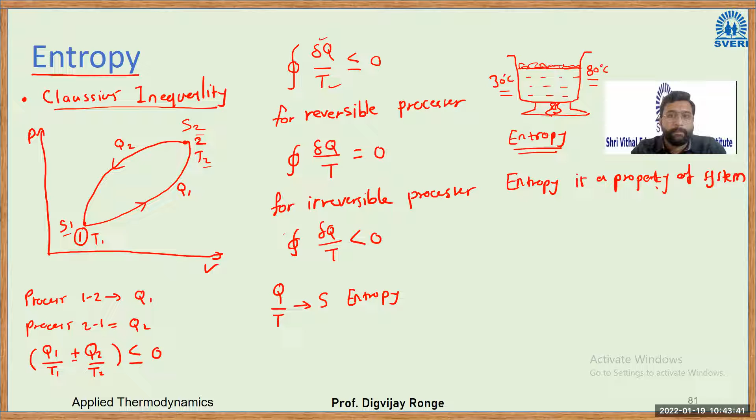Now, what about processes? We have studied about the cycles. Next I will draw a process. Let us say I have a P versus V chart. Initially we are at state 1. Slowly, a process takes place and it reaches state 2. What about entropy change in this process? For this, we have a rule that integration dQ/T is always less than or equal to 0.

Okay. Integration dQ/T is less than or equal to 0. Okay. So previously, write down this part first. Write down this for the cycle, and then we can go for the processes. Write down Clausius inequality.

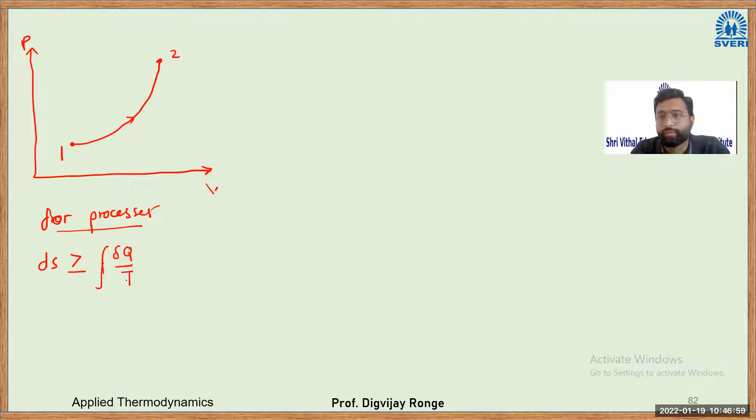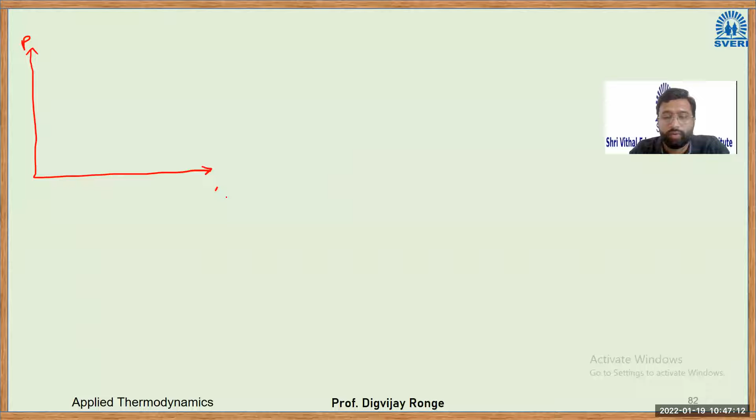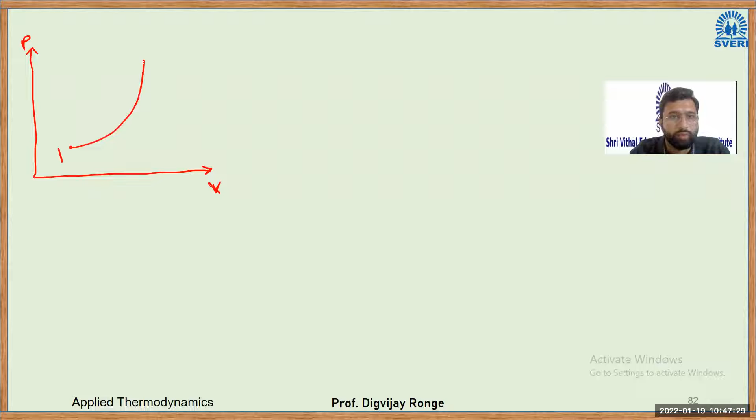Okay. So for cycles, we have this law: integration dQ by T is less than or equal to 0. For processes, what is happening to this? I don't know. Wait. I don't know why. Okay. 1, again I will draw 2. For processes, change in entropy is always greater than or equal to integration dQ by T.

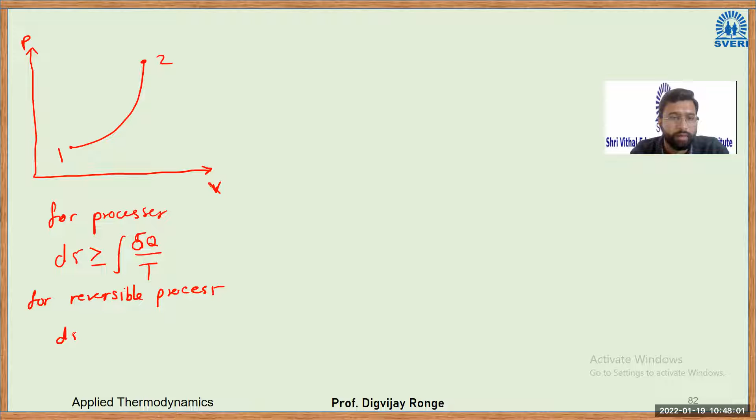Okay. So in this, if the process is reversible, so for a reversible process, in this case, change in entropy will be equal to integration δQ by T. Sorry, this is again integration here. So if I take the integration from 1 to 2, this will be S2 minus S1, equal to integration δQ by T. So this is only for a reversible process.

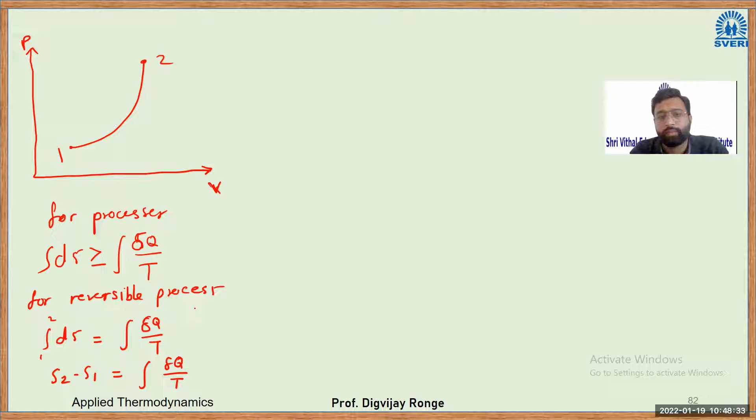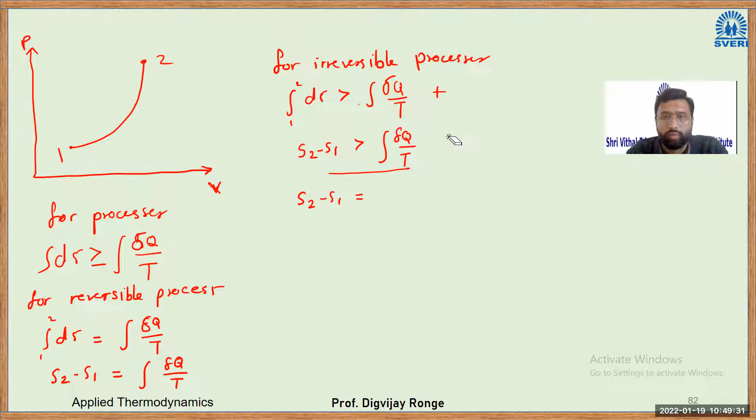Okay. What about irreversible? For irreversible processes, this integration dS is always greater than integration dQ by T. Now, if I want to make it equal, I have to add some quantity here. Then I can make this RHS equal to LHS, right? If I take integration from 1 to 2, S2 minus S1 will be greater than integration dQ by T. Now, if I want to make this equation equal, I have to add a quantity, so it is equal to integration dQ by T plus some constant.

And this constant, we have written it as S generation. What is S generation? S generation is entropy of generation. Okay. So see here, for an irreversible process, integration dS is greater than dQ by T, or S2 minus S1 is greater than integration dQ by T. If I want to make it equal, I have to add a constant on the RHS. This constant we are referring to as Sgen. Sgen is nothing but the entropy of generation.

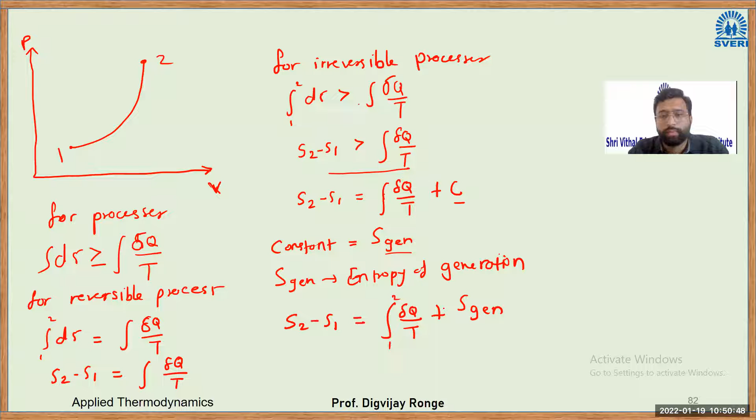So this is again a very important equation I'm going to write. S2 minus S1, that is change in entropy, will be equal to integration dQ by T plus S generation. This is again a very important equation in order to solve the numericals. Change in entropy is equal to integration dQ by T plus S generation. Okay, write it down.

Yes, written. Now let us talk about entropy of generation. Okay, this is again a very important topic. Entropy of generation, or what we call Sgen. Now, from the equation you can see the change in entropy. Let us say previously the entropy was S1, final entropy S2. This change in entropy is integration dQ by T. So whatever heat transfer takes place in this process, you take Q1 divided by T1 minus Q2 divided by T2, that integration, plus some constant. And this constant we are referring to as the entropy of generation.

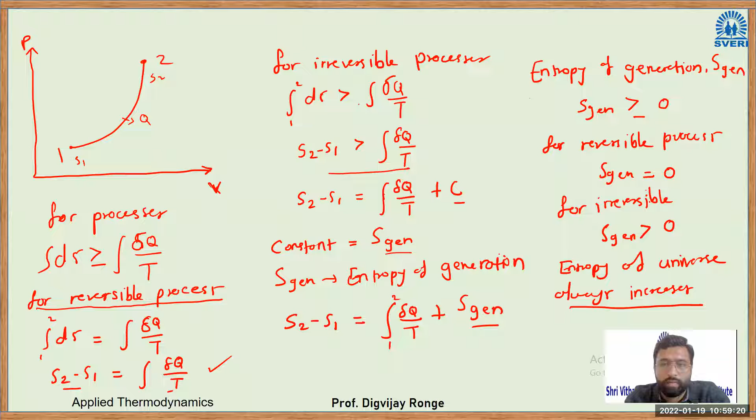Okay, so we'll solve one numerical here and then we'll see the next theoretical part. Okay. So this is related to Clausius inequality. Let us see if you can solve it. The figure below shows a reversible heat engine ER having heat interaction with three constant temperature systems. Calculate the thermal efficiency of the heat engine.

Now see here, there are three heat sources. Heat sources we have studied: thermal energy reservoirs at higher temperature. There are three heat interactions. There is one heat engine, which receives heat from these two sources, Q1 and Q2, does some work, and releases Q3 amount of heat. So in this case, we have to find its thermal efficiency.

For this, we have to make use of Clausius inequality. How? Because in this case, Q3 is unknown. Without knowing Q3, we cannot know the heat interactions. Without knowing heat interactions, we cannot calculate thermal efficiency, right? So I will write down the given data.

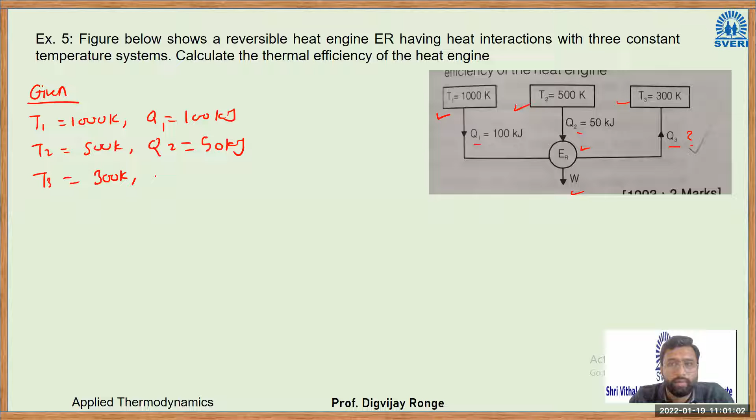Pay attention. So here T1 is given 1000 Kelvin and Q1 is given 100 kilojoule. T2 is given 500 Kelvin. Q2 is given 50 kilojoule. T3 is given 300 Kelvin and Q3 is unknown. W is also unknown, and we have to find out thermal efficiency.

Now, what is the formula of thermal efficiency? We studied in the last lecture it is equal to net work output divided by heat input. In this case, net work output is unknown, that we have to calculate. What is QH here? QH will be all heat received. It is known actually: QH is equal to Q1 plus Q2, so 100 plus 50 equals 150 kilojoule. That is QH, the heat received.

What about W? W will be equal to all the heat received minus all the heat lost. That will be equal to net work done. Again, in this case QL, that is heat lost, is Q3, which is unknown. Now, how to calculate Q3? For this, we have to make use of Clausius inequality. See here, this is a reversible heat engine. A heat engine, in this case, we can say, is a cyclic process.

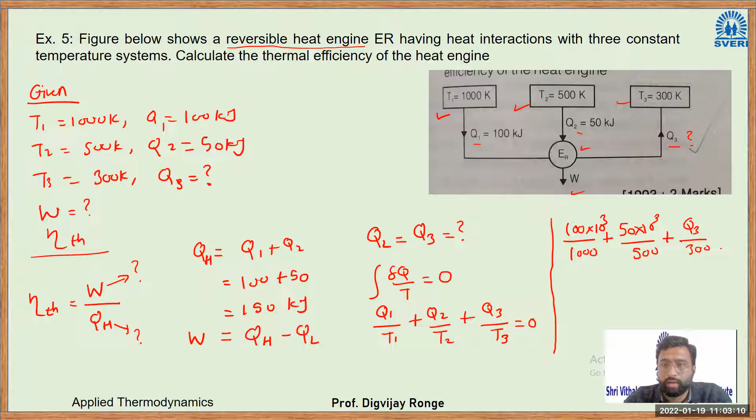So we can write it as integration dQ by T equal to 0, or I can say Q1 divided by T1 plus Q2 divided by T2 plus Q3 divided by T3 will be equal to 0. So see here, Q1 is given 100 kilojoule divided by T1 is 1000 Kelvin. So I will convert kilojoule into joule by multiplying it by 1000, plus Q2 is 50. So 50 into 10 to power 3 divided by 500 Kelvin plus Q3, unknown, divided by 300 will be equal to 0. So can you calculate Q3 from these equations?

Can you calculate Q3? So here I will cancel 1000 to 1000. So this will be 100. Again, plus I will cancel this 500 with this. So this will become how much? 50 into... this will become 100 plus Q3 divided by 300 equal to 0. So calculate Q3. Just calculate Q3. And by calculating Q3, calculate the thermal efficiency.

Okay, see, I will explain this example. So here in this case, we had two sources, one at T1, another at T2. Here we have a sink. So this is a sink and these two are the sources. There is a heat engine which receives the heat. It does some amount of work W and this is the heat loss. So we have to calculate the thermal efficiency: net work output divided by heat input. Heat input will be equal to Q1 plus Q2, the heat received from the sources. So that will be 150.

W here will be heat received minus heat loss. Heat received we know, but we don't know heat loss. So for that we have to make use of Clausius inequality. What is the Clausius inequality for reversible processes? Cyclic integration dQ by T equal to 0. So Q1 divided by T1 plus Q2 divided by T2 plus Q3 divided by T3 equal to 0. From this, we have calculated Q3 as minus 60 kilojoule. I have put this value here again, calculated W, and by calculating W, I have calculated thermal efficiency. So write down this problem. Very, very important problem.

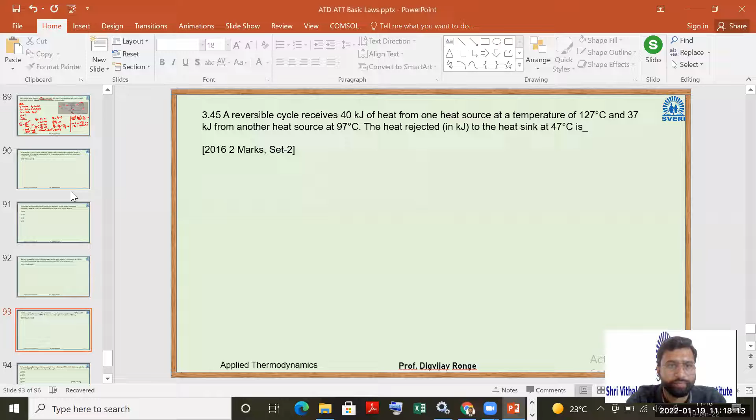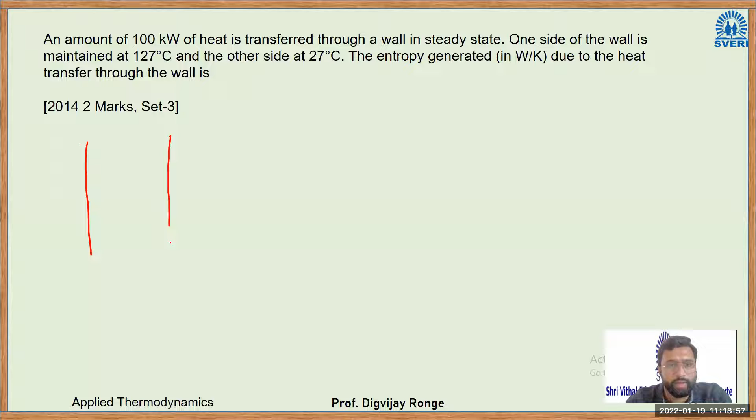So I'll draw a figure for your understanding. So there is a wall. Wait. So this is a wall, okay? What they are saying is one side of the wall is at 127, the other side is at 27. So let us say this is 127 degrees Celsius. This is at 27 degrees Celsius. Inside of the wall, there may be bricks, etc. Material will be there.

So this is the wall, and there are bricks, and on that bricks we have a plaster. Very common example. So amount of heat transfer here is 100 kilowatt, that means 100 kilojoule per second heat is transferring from this side to this side. Here we have to calculate total entropy of generation.

Right. Now see here, the formula for entropy change is S2 minus S1 will be equal to integration dq by T plus S generation.

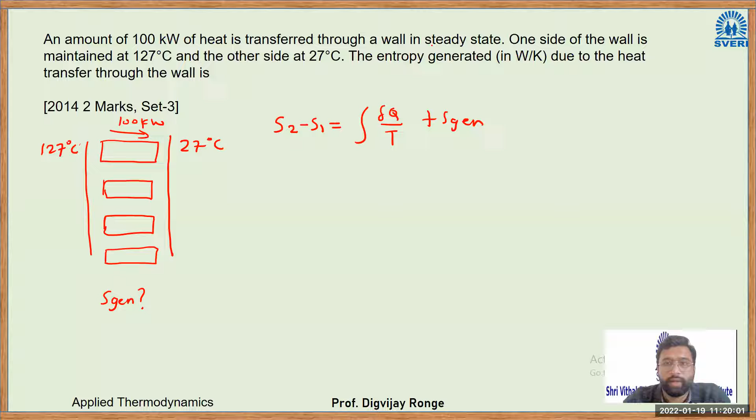Now see here, they have mentioned that heat transfer is steady state. What is meant by steady state? That means this value will be constant for longer duration. These values will not change with respect to time. Steady state means the values or the variables will not change with respect to time. So in this case, this system is under steady state.

So for the steady state, the changing entropy is actually 0. This S2 minus S1 is 0. There is no change in entropy due to steady state, only there will be entropy generation. So due to steady state we can say this term is 0, will be equal to integration dq by T plus S gen.

Now what is dq by T here? That is Q1 divided by T1 plus Q2 divided by T2 plus S generation. Now see here, Q1 and Q2 is same, that is 100 kilowatt. So 100 kilowatt I will convert into watts, 10 to power 3 divided by 127. Now I will convert this 127 into Kelvin, so it will become 400 Kelvin, and this will become 300 Kelvin.

So this will be equal to 400, and plus 100 into 10 to power 3 divided by 300 plus S generation. This side it will be 0 because the system is on steady state, the variables are not changing with respect to time.

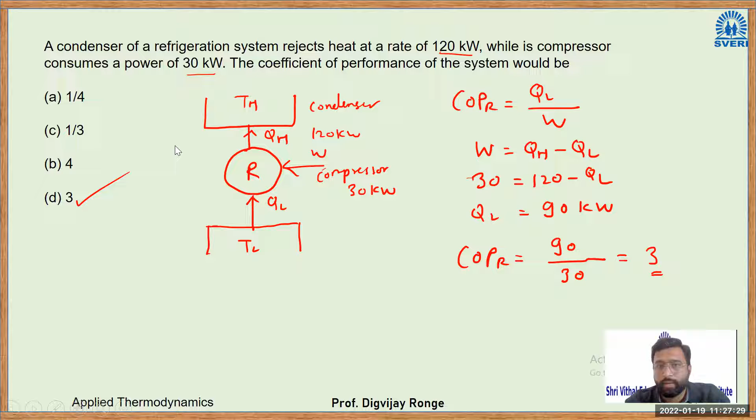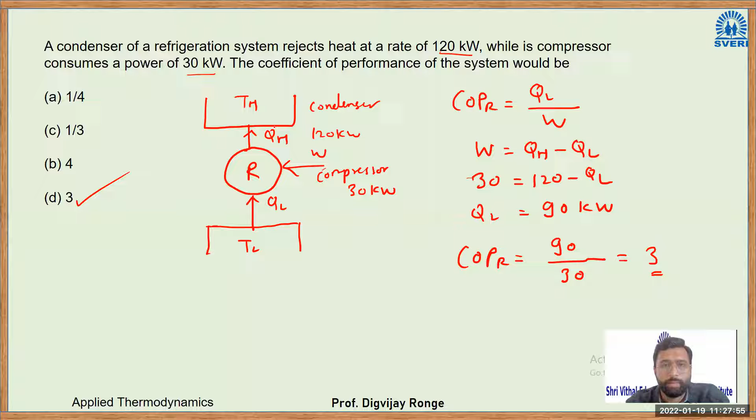Now let us take the next example. I hope everybody is clear about this example.

The heat removal rate from a refrigerated space and power input to the compressor are 7.2 kilowatt and 1.8 kilowatt respectively. The coefficient of performance of the refrigerator is asked. For this example, I will just draw the schematic, rest calculations you have to do.

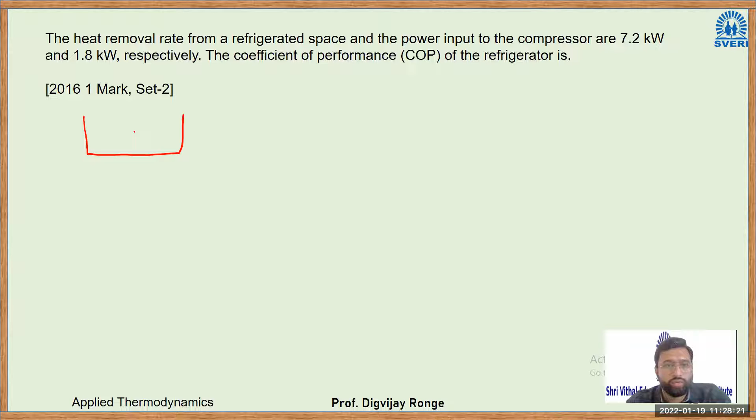So again, this is a source at TH, there is a fridge or refrigerator R, then there is a sink at TL. It will consume W amount of work, it will extract QL amount of heat, it will release QH amount of heat to the source.

What they are given here is heat removal rate, that means QL is given, in this case 7.2 kilowatt. And the compressor power is given, that is 1.8 kilowatt, that is external work done on the system. Heat extracted is nothing but the refrigeration effect, or here QL. You have to calculate the COP. What is the COP of refrigerator? QL divided by W. So calculate and tell me the answer.

Calculate the COP, how much will it be?

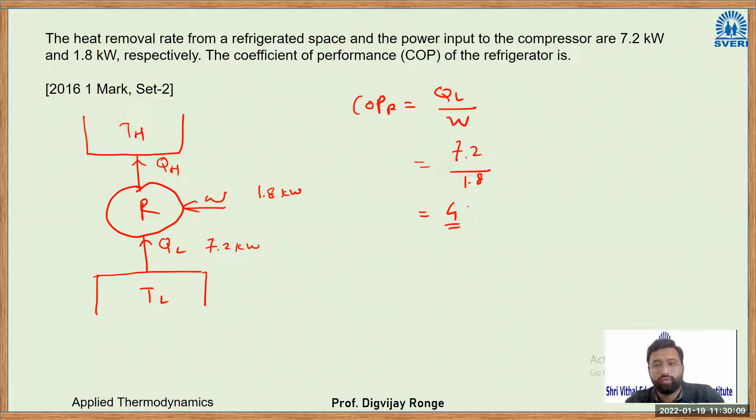Next is 3.45. So this is a numerical number.

A reversible cycle receives 40 kilojoule of heat from one heat source at temperature of 127 degrees, and 37 kilojoule from another heat source at 97 degrees Celsius. The heat rejected to the heat sink at 47 degrees Celsius is to be found.

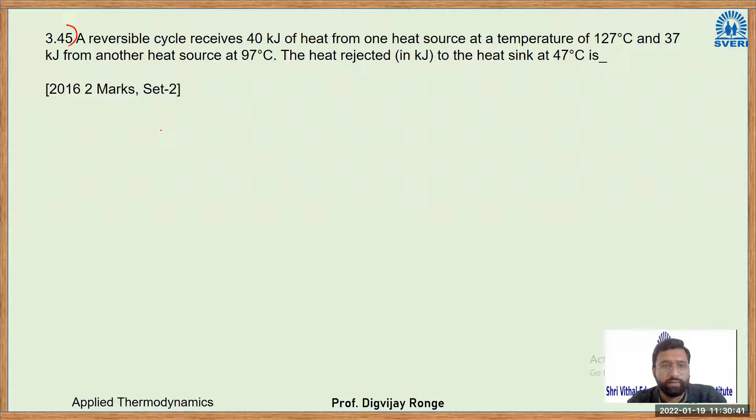So very interesting problem here. We have two heat sources and one heat sink. Let us say there is a heat engine. It receives heat from two sources.

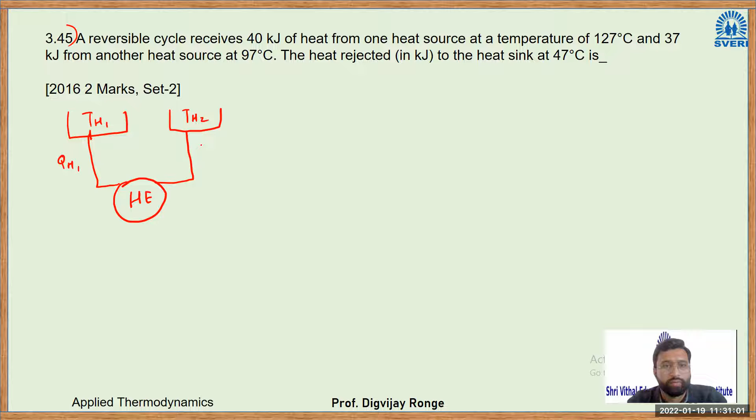So this is TH1, this is TH2, this is QH1, this is QH2, and it will do some work obviously, and it will reject a certain amount of heat to the sink at TL. It receives 40 kilojoule from the source which is at 127 degrees Celsius. It receives 37 kilojoule from another source which is at 97 degrees Celsius. Heat rejected to the heat sink is at 47 degrees Celsius.

Now I will write down the given values. TH1 is 127 degrees Celsius. If I want to convert it into Kelvin, I have to add 273, so that will become 400 Kelvin. QH1 is equal to 40 kilojoule.

TH2 here is 97 degrees Celsius. If I want to convert it into Kelvin, plus 273, so this will become 370 Kelvin. And TL is given as 47 degrees Celsius, again converted to Kelvin, this will become 320 Kelvin.

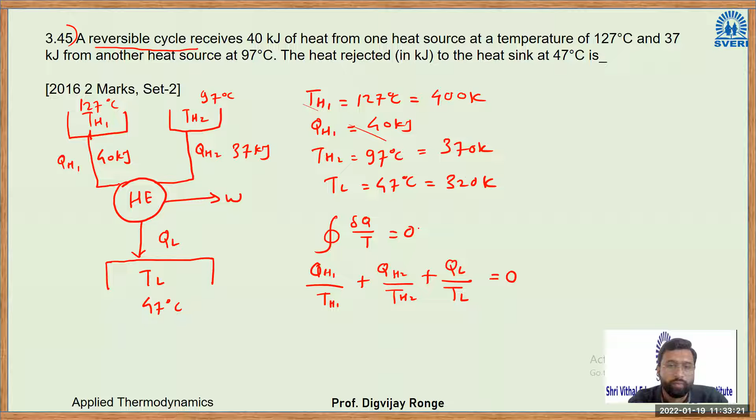For a reversible cycle, we can apply the equation: cyclic integration of dq by t equal to 0. So it will be qh1 divided by th1 plus qh2 divided by th2 plus ql divided by TL equal to 0. All the heat interaction entropy interactions will be equal to 0. So I will put the values here.

40 into 10 power 3 divided by TH1 that is 400, plus QH2 is 37 into 10 power 3 divided by TH2 is 370, plus QL is unknown, we have to calculate, divided by 47, that is 320 Kelvin, equal to 0. So from this, calculate QL.

Can you calculate? Or if I'm jumping too much, I will do it step by step.

So this will come out to be 100, plus this will come out to be again 100, plus QL divided by 320 will be equal to 0. So QL will become minus 100 minus 100 into 320. So this will become minus 64 into 10 power 3, or we can say minus 64 kilojoule.

So if they have asked you only the value in this case, if they are saying heat rejected, it is assumed that it is minus. If they are saying heat rejected, you should write only 64 kilojoule. If they are asking you the value of QL, then you can write minus 64 kilojoule. But if they are asking you only heat rejected, it is actually assumed that it is a heat loss, it will be negative, so you have to write just 64 kilojoule.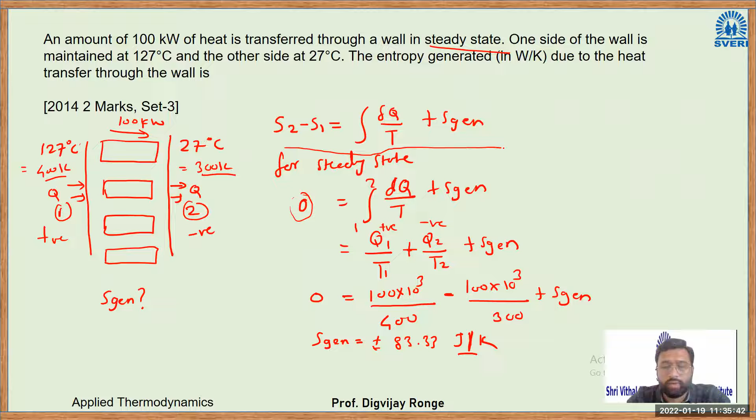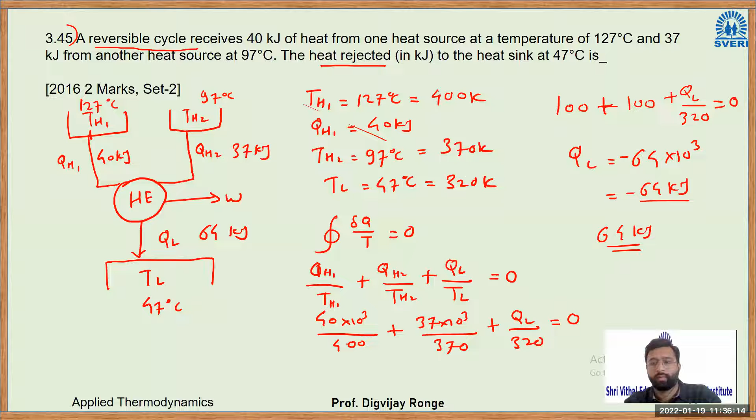Now I will take a last example and then we can stop. For a moment, I will stop the share so that I can copy the numerical.

Okay, so this is the last example of today. A heat pump absorbs 10 kilowatt of heat from the outside environment at 250 Kelvin, while consuming 15 kilowatt of work. It delivers the heat to a room that must be kept warm at 300 Kelvin. The coefficient of performance of the heat pump is?

So may I ask, what is the difference between heat pump and refrigerator? Let us see how many of you remember from last lecture. Does anybody remember what is the difference between heat pump and refrigerator?

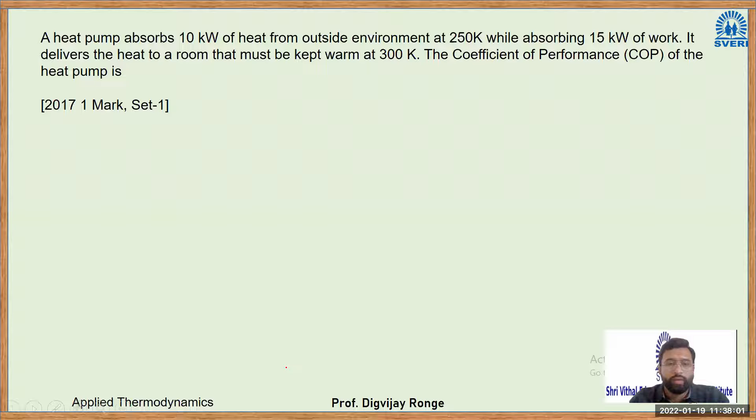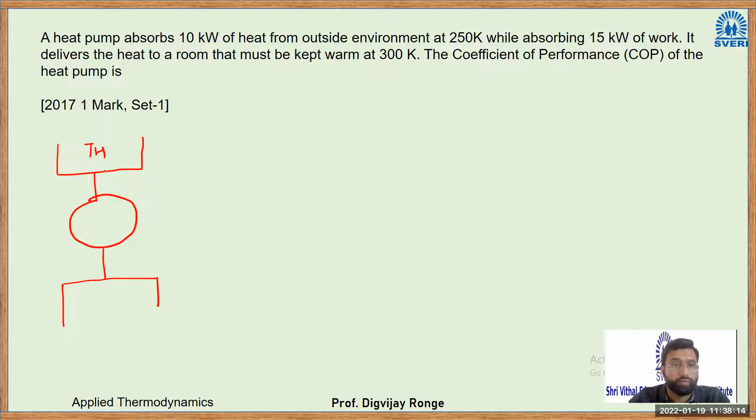So if you see the cycle, I will draw the cycle of a heat pump. This is TH, this is the heat pump, this is TL. It will absorb QL amount of heat, it will consume work W, it will transfer the heat QH. Now if you see, this diagram is same for heat pump and refrigerator.

The difference between heat pump and refrigerator is in its objective. The objective of heat pump is to maintain the source at higher temperatures. The objective of refrigerator is to maintain the sink at lower temperature. That is the objective of refrigerator.

Now what they have given in this case, let us write down. It absorbs 10 kilowatt, which is at 250 Kelvin. It consumes 15 kilowatt of work, and this room has to be kept at 300 Kelvin.

A heat pump is usually used in European countries, that is why we are not hearing its name.

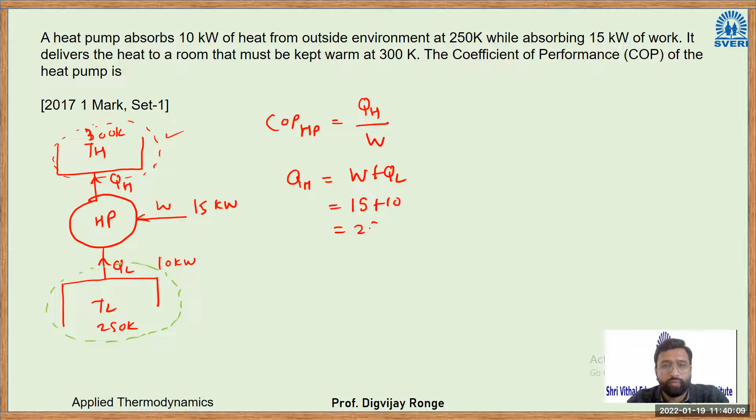Now QH is unknown, it will be equal to work plus QL. Work is 15 plus 10, so this will become 25 kilowatt, right? So COP of heat pump will be equal to 25 divided by W, which is 15. Calculate.

So COP has been calculated by Shubham, I think 1.67. I hope it is correct, Shubham. Yes, okay, so COP of the heat pump will be 1.67.

So this is a very classic question which is asked in interviews or external examinations: what is the difference between heat pump and refrigerator? So you can tell them that heat pump's objective is to maintain the source at higher temperatures, and the objective of refrigerator is to maintain the temperature of sink at lower temperatures. Calculating COP is a very easy part, as you may have seen. So write down this.

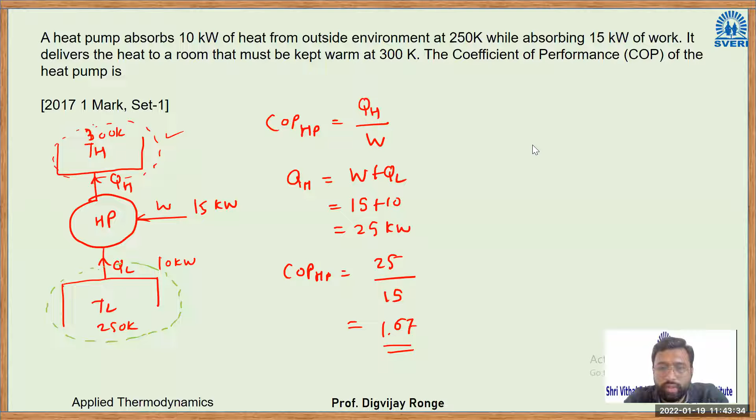Okay. I hope everybody has got the same answer, right? So let us move to the last part of the entropy, and then we can finish this concept of entropy today. So it is related to the entropy change for some of the processes, right? So we'll try to cover that.

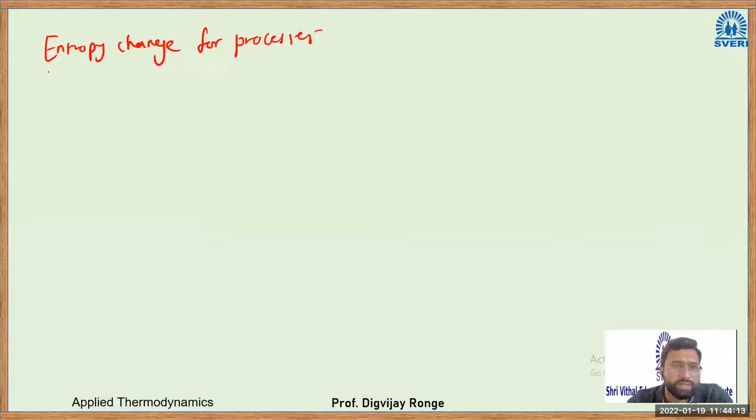So the title here, it is entropy change for processes. Okay, so there are some standard formulas. So first case here, it is for gases. What is the entropy change for the gases? Now, what is the specialty of gases? In gases, we have two specific heats, that is Cp and Cv. This is specific heat at constant pressure. This is specific heat at constant volume.

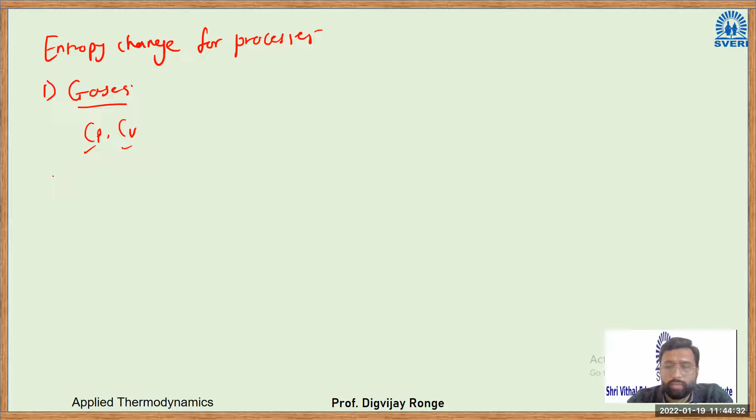Okay, so I'll just write down the formulas for your reference. So S2 minus S1, change in entropy, is equal to Cv ln, natural log, T2 by T1 plus R natural log V2 by V1, or it is Cp log T2 by T1 minus R log P2 by P1.

Okay. So write it down. For gases, change in entropy, these equations are there. S2 minus S1 will be equal to this much. And this is per mass. If you want to calculate in mass terms, you have to multiply by mass. The unit here is joule per kg Kelvin. This is the unit for entropy. I will check if we have some numericals for this.

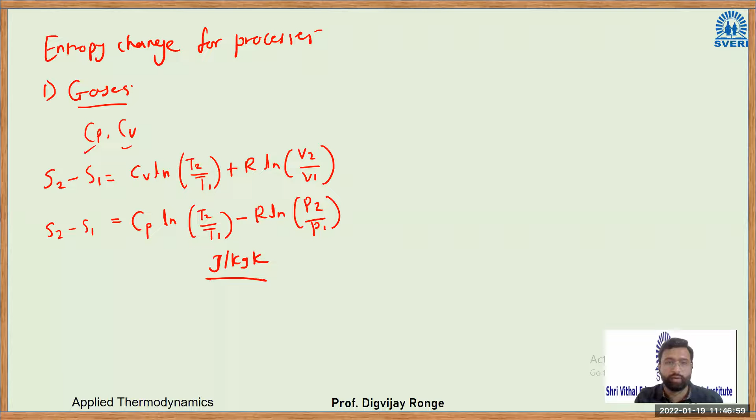Okay. So I will take this numerical and then we can solve it. So for gases, the formula is this, right? So there are other changes also taking place, like let us say for phase change processes, right? Anybody know what is a phase change process? So we have three phases, that is solid phase, liquid phase, and gaseous phase, right? So if you see the chart for the phase change, many of you might be already knowing. Let us say temperature versus volume chart is there.

Let us say we have ice, which is initially at minus 10 degrees Celsius. Here we have ice, right? When I increase the heat, it will be like this. Say temperature versus enthalpy I will take. And it will reach some point. This is 0 degrees Celsius. At 0 degrees Celsius, what will happen? This solid ice will be converted into liquid water, but a phase change process will take place, and the latent heat of fusion is added. By adding latent heat, it is converted into liquid water.

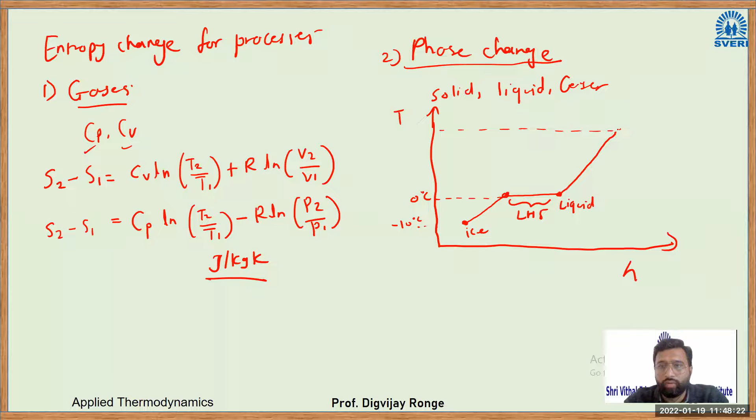Now again I will increase the temperature, it will reach a certain temperature. Now this temperature, we already know the boiling point of water is 100 degrees Celsius. At boiling point also, again I have to supply latent heat, that is latent heat of vaporization, and then this will be converted into vapor, water or steam. Again I can increase the temperature of steam. In this case, let us say this is again versus entropy.

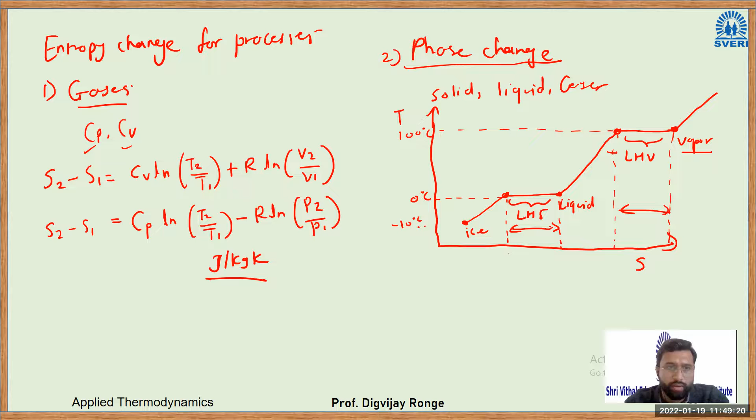The change in entropy for the phase change process will be equal to the entropy of liquid minus entropy of solid here, and in this case the change in entropy in the phase change will be entropy of vapor minus entropy of liquid. Okay, so it is as simple as it is. We have to take the difference between the entropies. So this is a phase change process. There are many applications where we have to find out the entropy change. So quickly I will take one numerical, I will add to the slide and then we can stop.

Okay, wait, just last numerical we are going to take. I'm transferring that file. Okay. Okay, copy. Right. So here I will add. Yes. I'll share the screen.

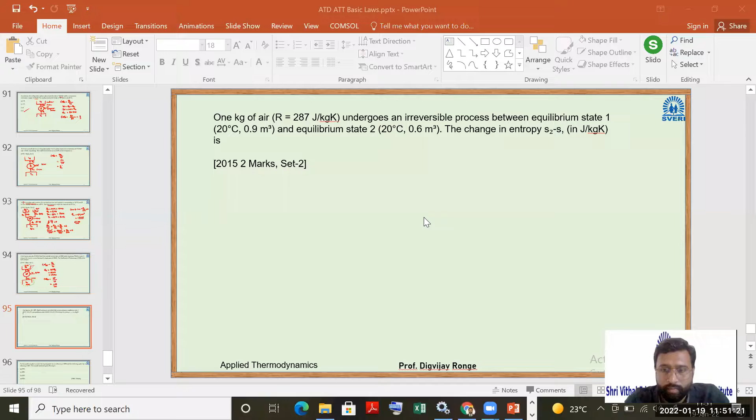Let us solve the last numerical of the day. So it says 1 kg of air, that is gas, its gas constant is given, undergoes an irreversible process between equilibrium state 1, conditions 20 degrees Celsius and 0.9 meter cube, and equilibrium state 2, that is 20 degrees Celsius and 0.6 meter cube. The change in entropy of the system is, okay. So here the formula is already there, as you might have seen.

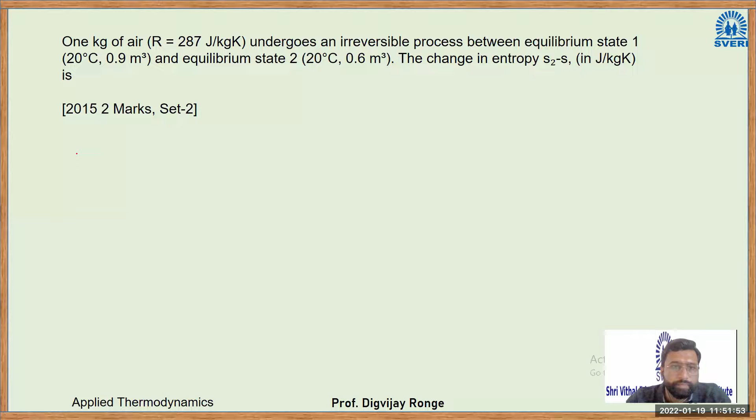S2 minus S1 will be equal to Cv log T2 by T1 plus R log V2 by V1. Now in this case, they have given the volumes, right? So that is why I have taken this formula. If the pressure values were given, I would have used the second formula.

What is the second formula? Cp log T2 by T1 minus R log P2 by P1. Now in this case, they have given the volume, so that is why I am going to take the first formula. So S2 minus S1 will be equal to Cv. What is the Cv for air?

The Cp value for air is 1.005 kilojoule per kg Kelvin. The Cv value for air is 0.718 kilojoule per kg Kelvin. So I'll write down the formula here: 0.718 into log T2 by T1.

What is the temperature value? It is 20. So T1 is equal to T2 is equal to 20 degrees Celsius. If I want to convert this into Kelvin, this will be 293 Kelvin. Okay. So 293 divided by 293, plus the R value, which is 287, into log V2 by V1, right?

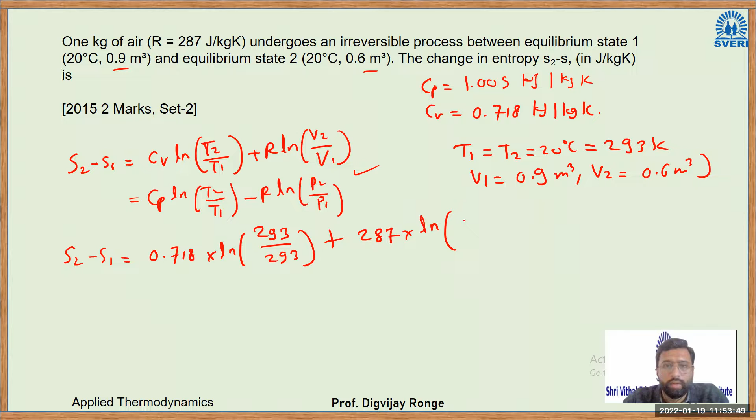What is the V1 in this case? V1 is 0.9 meter cube and V2 in this case is 0.6 meter cube. Okay, so what is V2 by V1? State 1 is this, state 2 is 0.6. So 0.6 divided by 0.9, right? So can you calculate the total change in entropy?

See, again, log of 1 is 0. So this will be 1, log of 1 is 0, so this whole term will be equal to 0. You have to just calculate 287 into log 0.6 divided by 0.9. So calculate this one, and this will be the value of the change in entropy.

Yes, what will the value of entropy change be here? Minus 116.38. Okay, minus 116.38. So this will be in joule per kg Kelvin. See, here the entropy is decreasing, so the change in entropy is negative.

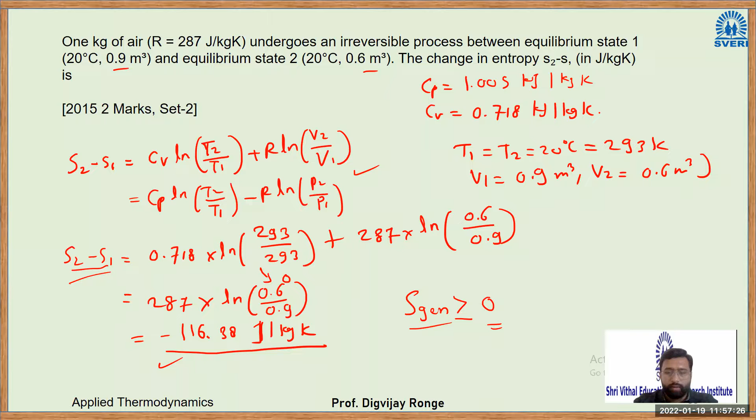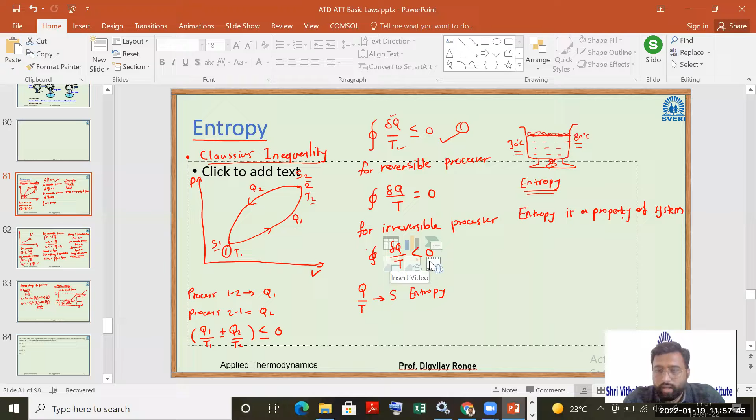Quickly I will cover what we have learned today about entropy. We started with Clausius inequality, that is integration dQ by T less than or equal to 0. For a reversible process it is equal to 0. For irreversible it is less than 0. For processes we have the equation integration dS will be always greater than integration dQ by T, and this reduces to S2 minus S1 equal to integration dQ by T plus S generation.

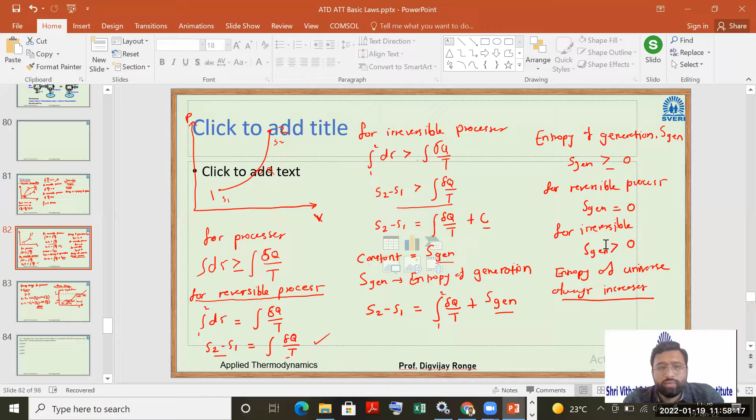S generation is entropy generation, which is always greater than or equal to 0. It is equal to 0 for reversible, and greater than 0 for irreversible. As all the processes in the universe are irreversible, the entropy of the universe is continuously increasing. Then we applied this equation for some of the processes.

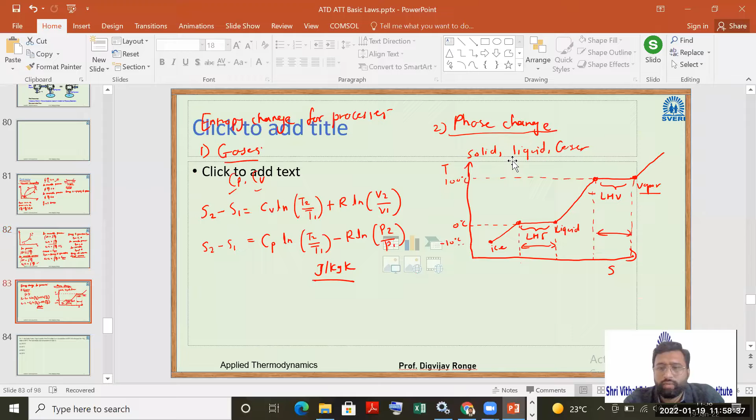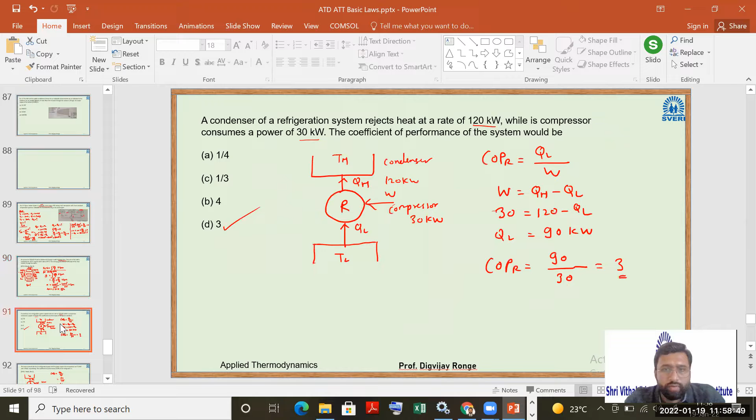First, we applied it for gases, so these are the two equations for gases. Then we can calculate similarly for phase change; how to calculate for phase change, we'll see in chapter number 2. Then we solved some numericals related to entropy, where we applied the formulas. This example was related to irreversible processes. We solved for cyclic also, right? The last numerical was related to entropy change for gases.